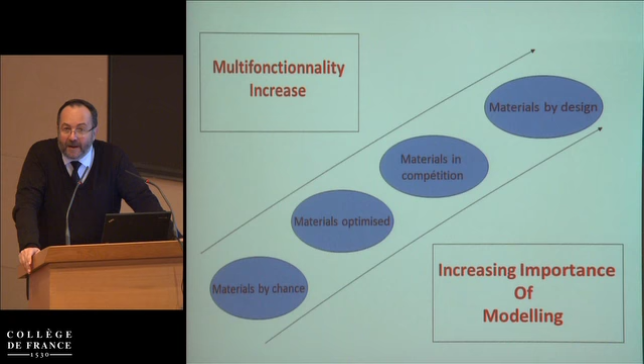This evolution from material by chance to material by design goes together with increased multifunctionality in materials and with increased importance of modeling, in order to explore the space opened up by the various possibilities of creating new materials. So the outline of the course was as follows.

That was a sort of overview of the strategies to obtain high-performance materials. I'm not going to redo the whole series of lectures. I just wanted to put that in perspective, because today we are just going to look at 2 cases for which we'll use all the lectures, all the topics introduced during the 9 weeks.

These 2 topics will be architectured material and bio-inspired material. But that will be understood in a general sense, meaning we will also look at the way of designing microstructure, and the way of processing the material.

The idea is to say: when we have a gap in the space of materials, what are the possibilities to fill this gap, making use of everything we already know in material science, and identifying what topics still need to be explored.

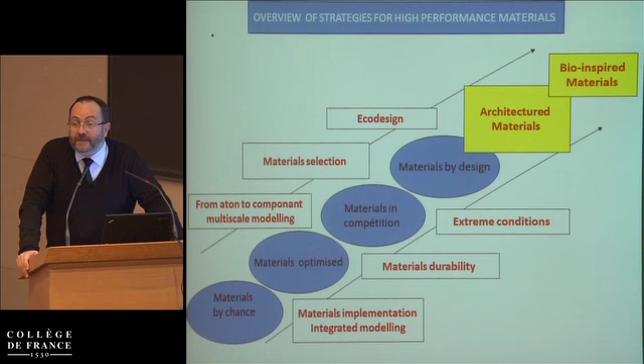Now, the material families we are going to explore are these ones. Of course, naturally there is always a slight bias towards metals. I cannot really apologize for that - I love metals, okay?

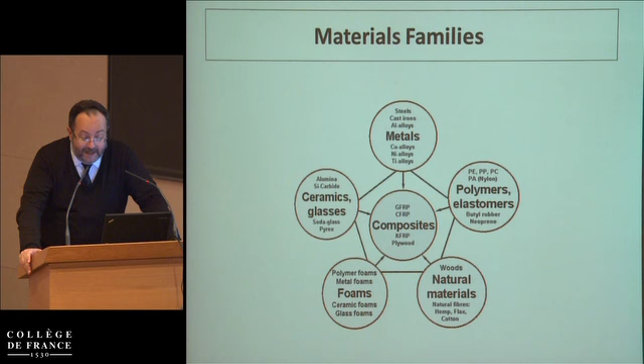But what we try to do here is something generic across the various aspects, and we'll look at the ways of combining materials and combining geometries, in order to obtain properties that otherwise wouldn't be possible with a simple bulk material.

Now the key word here is Swiss cheese. The material space is a Swiss cheese with big holes and regions which are sparsely populated. So what we want to do is fill this Swiss cheese.

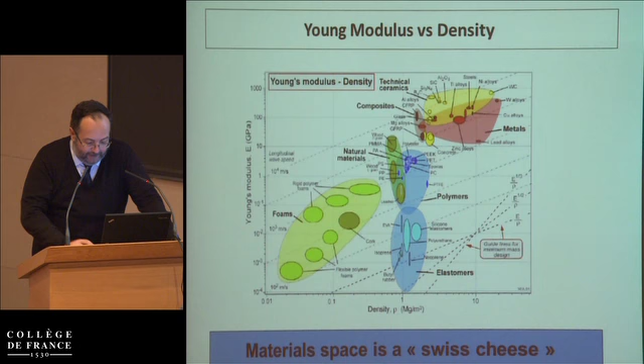And I'm going to show you the first sandwich of the series of lectures, which is this one. The examples I'm going to give are stuffed between 2 skins of the sandwich. The first one is: how can we fill the holes, and the second one is: do we really want to fill the holes?

Between these 2 questions, we'll look at what can come from microstructure design, from associating materials - the case of composites - from architectured materials, playing with geometry, mixing the various strategies, and finally bio-inspiration. That's the stuff of the sandwich here.

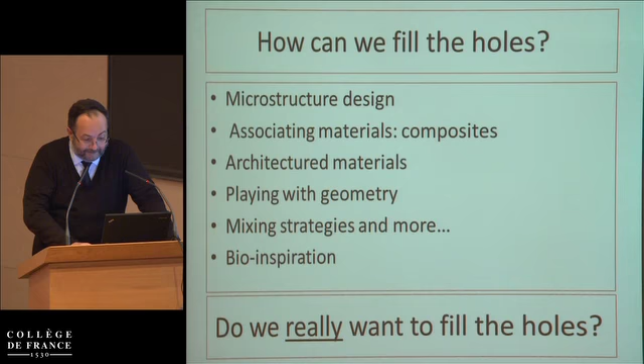Each of these topics will be treated in more detail, either in today's presentations, which are very much about method, or tomorrow's presentations, which will be very much about examples.

Now, microstructure design - let's look at the first contradiction we want to fill. That's a famous curve which I used to call the banana curve. So we start from sandwich, we go on with banana.

All of this is becoming very gastronomical. The banana curve is the counter-correlation between elongation and yield strength in materials, and here it's focused on one of my favorite materials, which is steels.

Here you find that a material with high ductility usually has a low yield strength, the IF steels, and a material with high yield strength generally has low ductility, which is the case of martensitic steel. The whole dream of scientists in steel metallurgy is to escape from this banana curve and develop a material that has a good combination of ductility and strength.

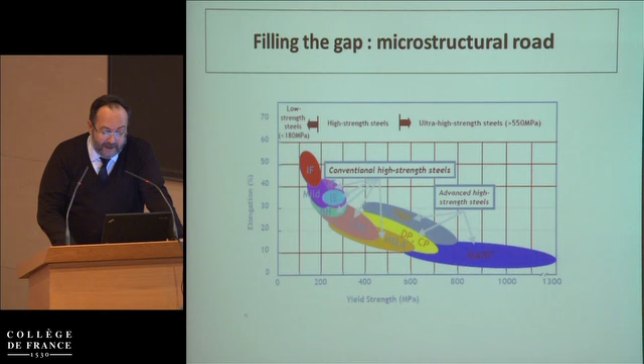Now, the standard way of doing that is to play with the microstructure. So the metallurgist's dilemma is to combine strength and ductility, which are usually contradictory. How can microstructure design find a compromise? The reason for this contradiction has a very deep physical basis, which is the following.

When you look at the plastic deformation of a material with some plasticity, you have the yield stress, which tells you when it starts to plastify, and when the material starts to plastify its stiffness becomes lower. The increase in stress to get an increased strain is smaller than in the elastic regime, and this is called work hardening.

Now, if you look at the possible localization of deformation, if in some region of the sample under tension the deformation gets more localized, at that point you have a higher yield stress, but also a lower section. If the increase in flow stress, related to work hardening, cannot match the increase in local stress from the reduction in section, you get into trouble. Getting into trouble means the localization of deformation continues and leads to rapid failure.

So any material with high yield strength, which favors stress localization where there's a change in thickness of the sample, will need high work hardening in order to spread the plasticity instead of localizing it. That's the intrinsic reason why the stronger a ductile material is, the less ductility it has.

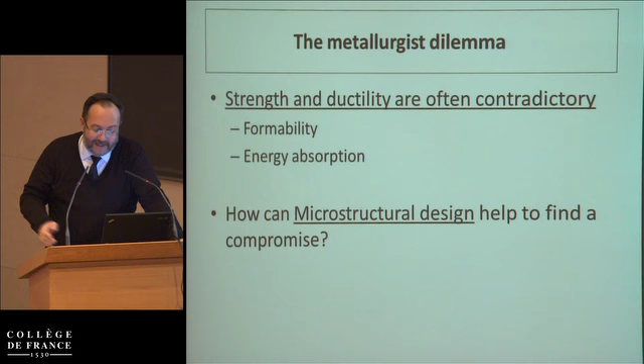Now, that's something which came from composite material but is reused in classical material, called dual phase steels. Dual phase steel is basically a natural version of the composite material - natural meaning you don't mix the inclusion inside the matrix. So there are steels with martensite islands, coming from quenched austenite, embedded in a polycrystalline ferritic matrix. The matrix deforms plastically, the martensite is elastic and fragile, and that's a natural composite.

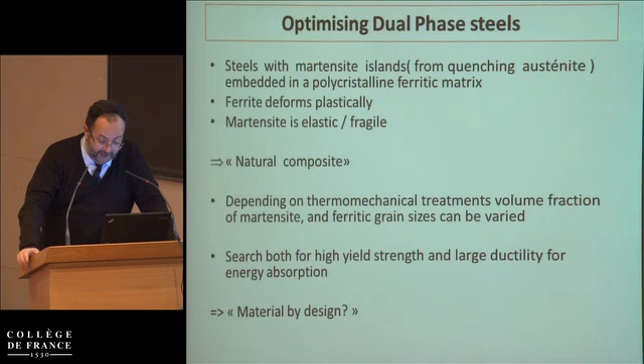You have this mixture of ferrite and martensite. Now what I want to show you is the kind of optimization you can get. That's coming from micromechanics modeling of the behavior of the ferrite plus martensite mixture, and the ferrite behavior also depends on the ferrite grain size.

What you can find is that depending on whether you want maximum energy absorption or maximum resistance with ductility of at least 8%, which are typical requirements for this kind of material, this modeling can give you the best carbon content, the best volume fraction of martensite, and the best grain size in ferrite. So what we've done here is design a material tailored to meet a requirement that would be difficult without this mixture effect.

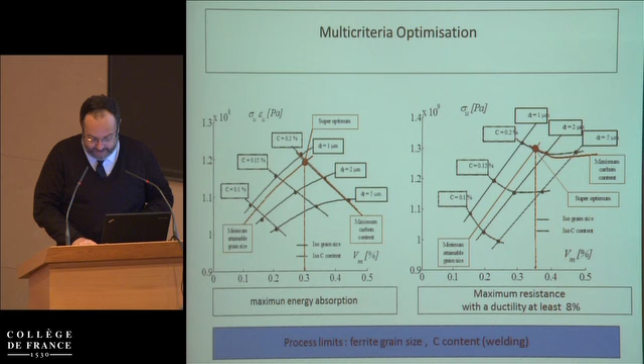Now let's go to composite material, the most classical composite material. What I want to show you now is two examples: an example which is a selection map for light and stiff material, in which you would have a mixture between metals and ceramics, which is a classical metal matrix composite.

Here this mixture would be, for instance, between titanium alloy and carbon fibers. These two materials, titanium alloy, which is represented in this place here, that's a diagram with the Young modulus and the density. The carbon fibers are here, and the properties of the mixture between titanium alloy and carbon fibers will lie somewhere here. These boundaries are given by a micromechanics model, and this maximum here is given by the processability, which is how much carbon fiber you can introduce into a titanium alloy.

So you will have different ways of making mixtures of carbon, of titanium, or any sort of alloy with ceramics, and these mixtures will give you materials which would have a better, say, E to the 1/3 divided by rho property, which would give you the stiffness at minimum weight for a plate, for instance. Now, that's what we call the standard composite.

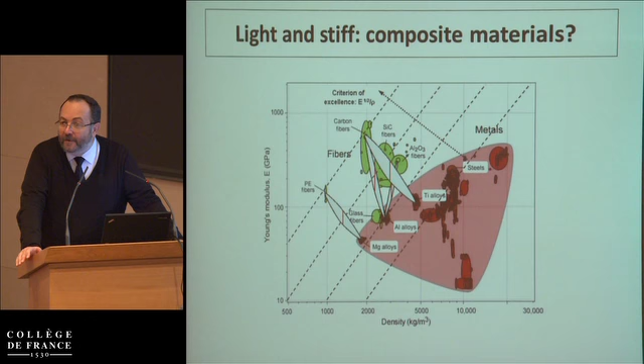Here, of course, it's purely theoretical because you need to know the effect of the mixture between the ceramic and the material, and one ever-coming problem will be the interface between both of them. We'll have a number of talks about the role of interface in the properties of hybrid materials.

Now I want to give you another type of composite, which is a bit more sophisticated, a composite developed for high field magnet design. These materials are wires, they need to conduct electricity, and they are wound around an electromagnet.

What you want to do is make a very high magnetic field, which means you have pulse fields, which means you are releasing a large amount of current in a very short time, in order to reach magnetic fields of the order of 30 Teslas or something like that. They are enormous, which means you are confining a magnetic field inside a finite space, and this confinement gives you a high magnetic pressure. This high magnetic pressure is really a force on the winding, which might destroy the winding.

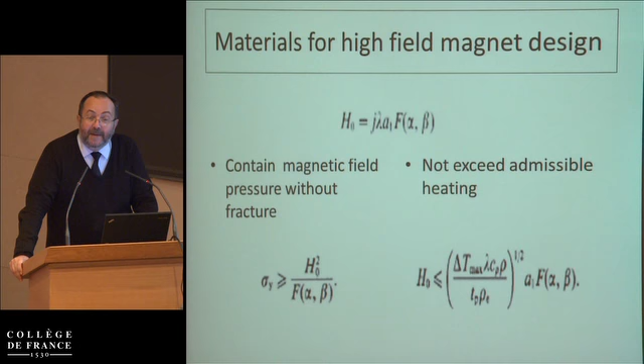Now, you need to contain the magnetic field without fracture. That gives you a first criteria between the yield stress and the field you want to obtain. And of course, you don't want to heat too much, which requires a high conductivity material, and gives you another maximum field you can reach, related to the thermal conductivity, the diffusivity, and the electric conductivity of the material. These two combinations of properties are performance indices, which tell you if the material is suitable to make a high field magnet.

Now, if you look at the material selection charts, which would be on one side the yield stress, and on the other side the combination of electrical conductivity, density, and thermal capacity, you will have here the requirements for various Teslas, various fields you want to reach, and various durations of the pulse.

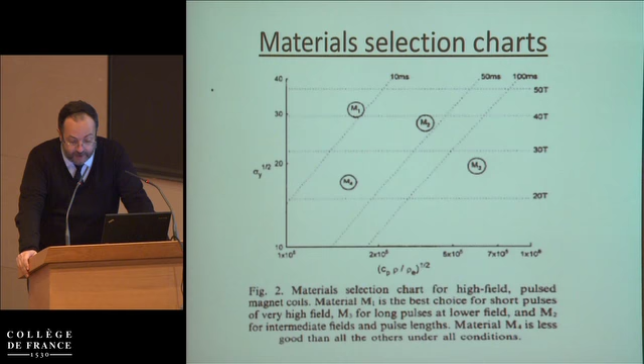Now, here are the candidate materials that you have on these selection maps, and these are very often copper-based materials, either pure copper, or copper reinforced with beryllium, or copper reinforced with niobium, with silver. Pure copper is very good for resistivity, but not good for strength. Maraging steel would be very good for strength, but not very good for resistivity. Again, you have a contradiction between the properties.

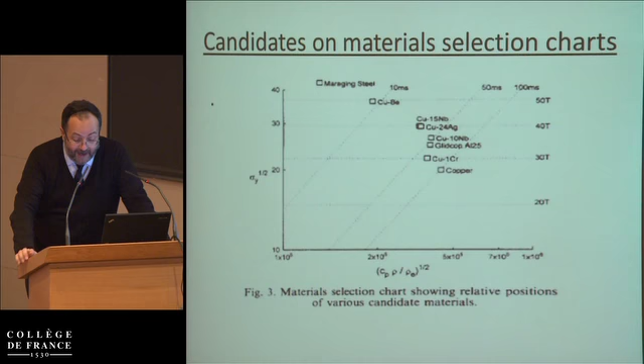Now, one way of dealing with that is to make a composite of composites, and we'll see this example in a number of cases in natural materials again. This composite uses, for instance, a copper-niobium multi-filament structure, which will be extruded. When it's extruded, you take the extruded fibers and put them together again, and again, and again, and you get a multi-architectured structure going from the nanometric scale up to the microns, or up to the millimeter, which is the size of the final cable you try to obtain.

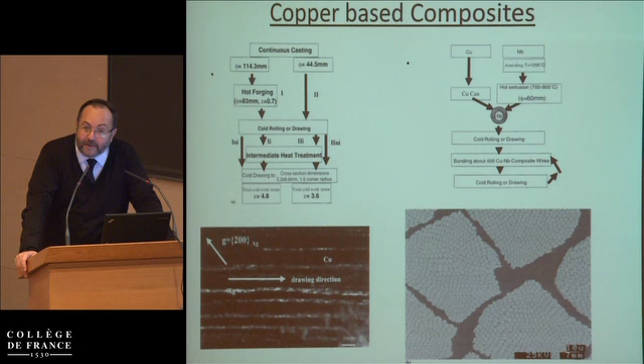Now, interestingly, you can have a direct relation between the yield stress and the spacing between the niobium fibers inside the copper matrix. This spacing is related to the amount of strain imposed on your composite. So you have on one side a process parameter, the strain, which controls the strength of the material, simply because the obstacles prevent the dislocations from moving. That's the meaning of the first equation. The second set of equations is the relation between the electrical resistivity and the distance between the fibers, because the fibers play the role of scatterers for the electrons.

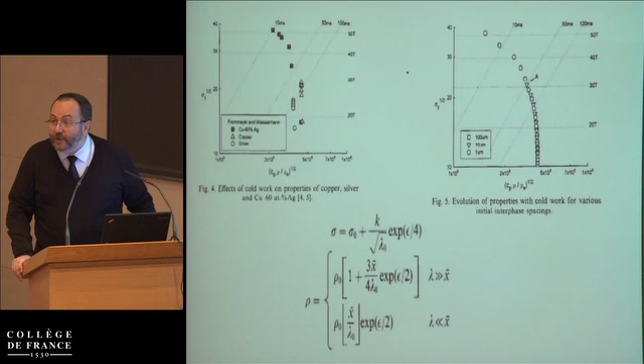So again, you have a possibility to relate one process parameter, which is a strain, to the other property. Now what you have here on this diagram is a way of exploring the performance diagram by using different strains, looking at where you should strain the material, how far you should strain the composite, in order to reach the point you want in terms of duration of the pulse of the field and magnitude of the field.

Now let's go to the architectured material, which is another strategy to fill the gap. I want to make a point of vocabulary, because people are always complaining about the difference between hybrids, composite materials, and architectured materials. I think the grammarians in Byzantium were discussing the sex of angels while the Turks were surrounding Byzance. So I think we shouldn't do that. The idea is just to see different ways of looking at strategies to improve material.

The composite can be understood as a mixture of material. A hybrid material is much more controlled in a way, so some composites can be seen as mixtures, as hybrid materials. The hybrid is a combination of two or more materials in a predetermined geometry and scale, optimally serving an engineering purpose. That's coming from the PhD of François-Xavier Kromm, who is in the room.

Now, what is an architectured material in addition to that? In addition, we have one length scale of the microstructure of the architecture which is of the order of one length scale of the component in which you are going to use the material. Okay, so that's what I call architectured material.

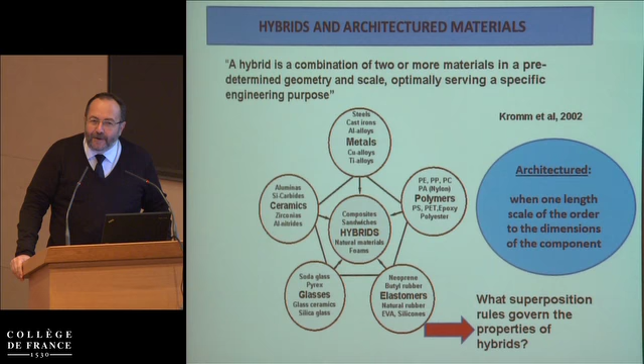Now the question is, what is the superposition rule which governs the properties of the hybrids? And when you come to the situation of one length scale being comparable in the material and in the component, then you have an extra condition, which is: what continuum description can be provided in that case? I think that's still an open question - what continuum description can you provide of a material whose internal scale is not very small compared to the scale of the component in which you're using it?

Now, the architectured material - that's my pet architectured material - is the combination between conductivity and strength. What I want to discuss more now in detail is the combination between conductivity, bendability, and electrical insulation, which is this architectured material, this cable.

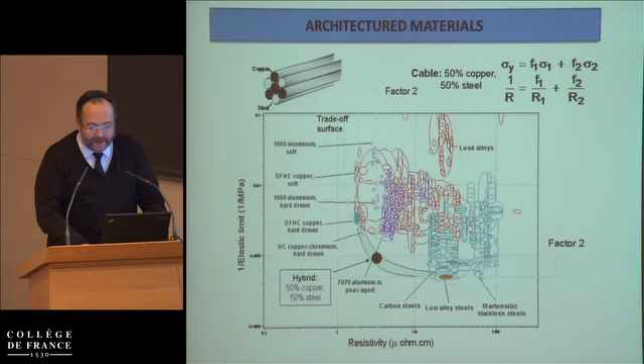Okay, so let's look at the general strategies to get that. You first analyze a requirement, and you look in terms of function and constraint, and try to look at what are the contradictions. So here I want to design an electrical cable combining longitudinal conductivity, radial insulation, and elastic bendability.

Now there is no material which meets all these conditions, so I'm going to decompose these requirements into a number of requirements, each of which is going to be dealt with by a material, and then I will have to join the materials together.

So good conductors are metals, but they have a high modulus and high flexural stiffness unless they are thin enough. Now, if we look at the function of longitudinal electrical conduction and elastic bendability, copper can provide that. If you look at the function of longitudinal radial electrical insulation and elastic bendability, a polymer can do that. A ceramic would give you the insulation, but would not give you the bendability.

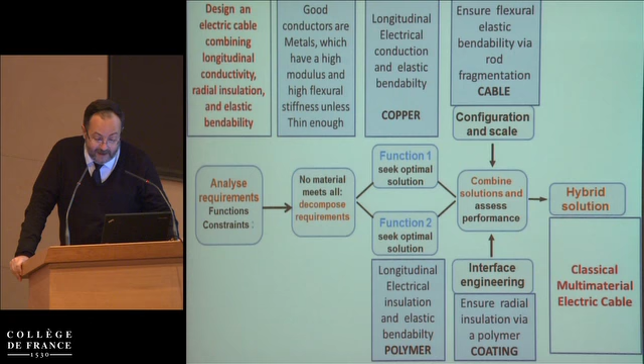Now, these two materials are going to be put in a given configuration. So instead of having one single rod, you are going to fragment that into various filaments, and that will create the cable effect, ensuring flexibility. You will have to deal with interface engineering - how can you be sure that the polymer is properly sticking to the wire? Then you can get a hybrid material. The classical electric cable is one example of this multi-material approach.

Now, we have seen a number of these multi-material, architectured material examples in the series of lectures, and we'll see a number of them again on the second day.

Now let's play with geometry a bit, which is another one of our strategies. Here is the simplest geometric effect you can think of: you want to add stiffness, or you want to remove stiffness. That's something people in mechanics have known for decades. If you read the nice books from the 50s about designing airplanes, you have a number of ways of stiffening an airplane which are just absolutely fantastic. The imagination of these people was absolutely remarkable.

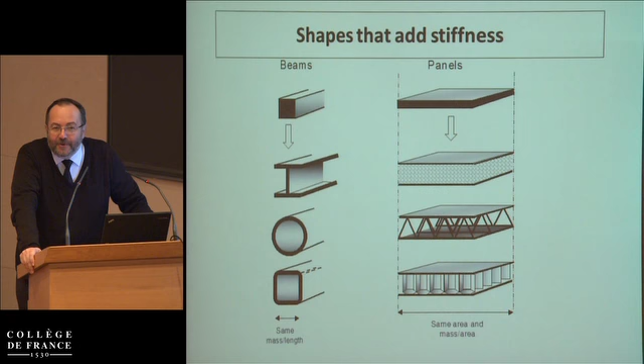If you look at the table for cables, the number of possible organizations of cables in order to ensure flexibility, bendability, strength, friction between the filaments, conductivity, heat transfer, vibration damping, and so on, is also a very huge variety.

There are things which are a bit less obvious, for instance when you want to stiffen a sandwich, you can put a foam inside, which makes the two plates sufficiently apart from one another, so that the elastic momentum of the section of the sandwich is large enough. That's one possibility. To put them far apart together, you can put a foam into that, but you can also put a truss structure.

The truss structure is a very nice example of architectured material. Here you have the picture of a truss structure on top. But now, what you want to do as an engineer is make a lot of them, make them cheap, and make them efficiently.

Now you see there is another problem after. If you have this structure, which is a cheap way of making this truss structure, you still have to put that into two plates, so you have to find an efficient way of joining the two plates together. Then you can think of gluing, brazing, welding, and so on.

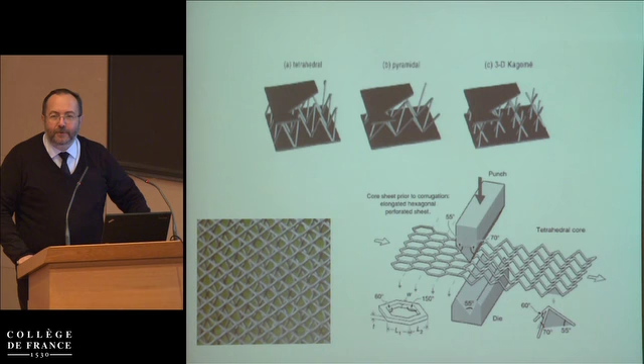I think the reason I wanted to show you this picture is that it's all fine to imagine a very nice architectural material, but you have to think of the way of making them. We will have a number of examples which will show how to make architectural materials.

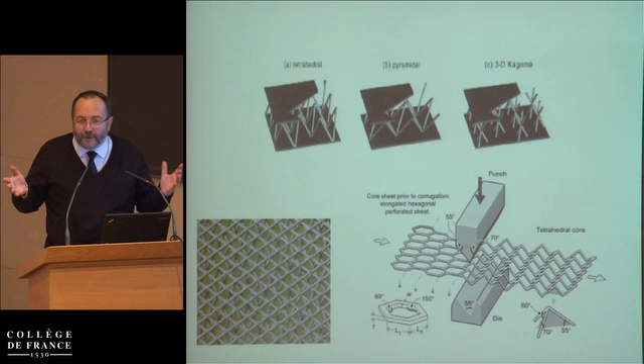The strategy of people coming from chemistry is to make them bottom up, to start from the atoms and stack them in a self-organized way in order to end with a structure. What we are going to examine here is a way to get the material top-down, starting from macroscopic aspects and trying to look at processes to get these architectures.

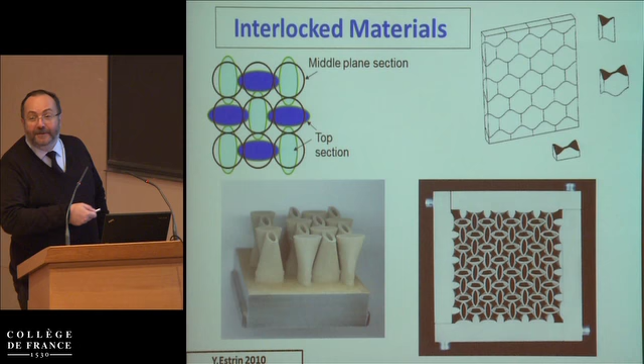Now, mixing strategy—after all, do we have to choose between playing with a microstructure and playing with a geometry? I'm going to give you an overview of these architectural materials in terms of scale and in terms of ways we can combine them.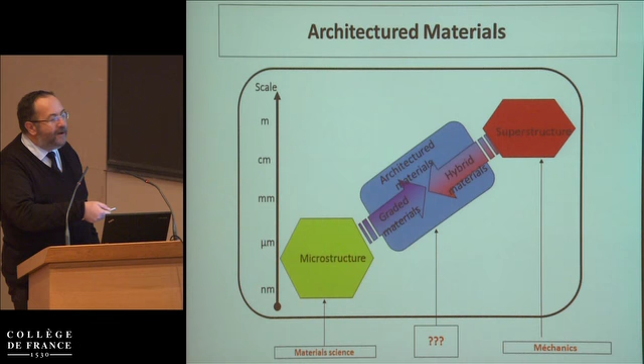So here you will find the foams, you will find the truss structure, you will find the wools, you will find the entangled material. So this bunch of possibilities opens up a wide variety of materials.

Now, here is an example. Again, I want to show that you can get an architectured material by standard processes.

This is the process by which you can make a more ductile material, which is very strong, when the ductility is limited by the propagation of cracks from the surface. If you manage by phase transformation to have a soft layer at the surface, it acts as a protection against crack propagation, which proceeds inside the soft layer, and when it reaches the hard material, the crack has been blunted by its first pass. You get a material which is both strong enough, because you've kept the properties of the core, and more ductile, because you've killed the dangers of, for instance, machining scratches on the component. That's an example of an architectured material obtained here by phase transformation.

Again, we are back to my old friends, the steels. What we are doing here is removing the carbon by annealing the material in argon hydrogenated gas, which removes the carbon, and you have at the surface a layer of ferrite, which is soft by nature.

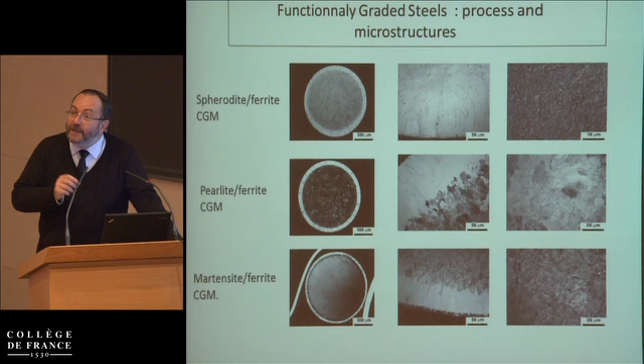Now, we don't have to choose, and I want to give you this picture, originally due to Olivier Bouaziz. If you want to make a shaft in torsion, stiffer, and keep it light, one way is to go to the material scientist and say, I'm going to make a composite. If you go to a person in mechanics, he'll say, I don't need to make a composite, it's a shaft in torsion, so I can take the same matter and distribute it on a larger radius with a hollow core, which increases the torsion momentum, so with the same amount of matter, I get something stiffer.

Now, you're not bound to choose between material science and mechanics. Nobody prevents you from doing both, using the geometry and the materials and the composite.

When you think of it, you've only done half of the way here, because you've equally distributed the reinforcement along the radius. But really, the region where you need the stiffening is the outside, not the inside. So another way is to make a gradient, with a higher density outside and a smaller density inside. Now you have to think of the process to do that.

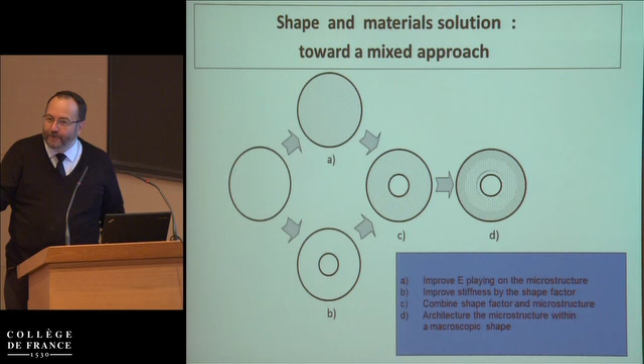It can be done by rotating casting, in which the particles would go to the outside, and you would have a gradient which is basically the equivalent of Perrin settling. Instead of having it vertical, you would have it around the radius, and the role of gravity is simply replaced by centrifugal forces.

Now, what you have to keep in mind is that for a given set of requirements, you need to select the material and the process, but also the microstructure and the architecture. In each case, you need to look at the relation between the architecture and the properties, and what process allows you to get this architecture, but also the relation between the microstructure and the properties, and what process allows you to obtain these properties.

And that's not always obvious, because the processes are very often used for bulk material, and if you go to architectured material, you're going to have material with thinner parts, for instance. So an interesting feature is how you can develop a foam of metal with structural hardening, and what heat treatment is necessary to obtain the appropriate microstructure inside the structure, which in itself, by its geometry, already has different thermal properties than the bulk material.

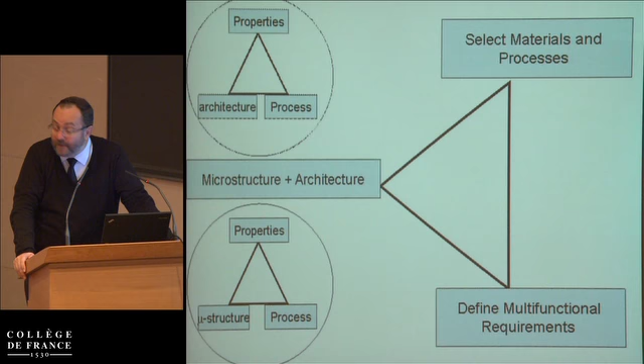Now, let's go further, because here I've shown you the microstructure, I've shown you the architecture, the composite, how we could have them all together. So if we go on looking at possible strategies, I'm going to give you an example due to Bernard Herrieix, on which there has been a number of studies, including by Rémi Dendievel, which is the question of thermal management in buildings.

So you want a device able to store a lot of heat and also release it rapidly. Basically you want to deal with the peak of the tartine le matin and of the noodles in the evening, to smooth out the extra consumption of energy along the day. What you need is a material with high thermal inertia to store heat, but also a material with high thermal conductivity to release it efficiently.

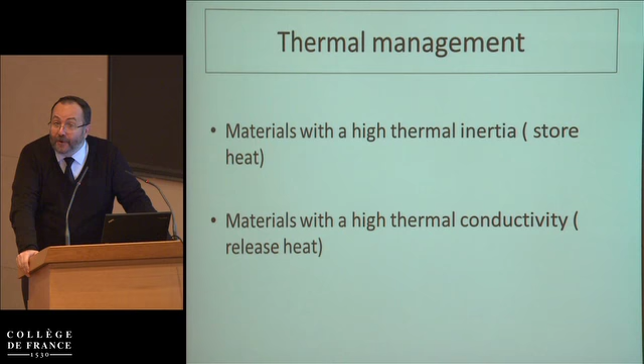And bang, no chance. If you look at specific heat and thermal conductivity, they are exactly anti-correlated. So again we are in a situation where there is a hole in the space of materials, and that's a hole we want to fill, somewhere here.

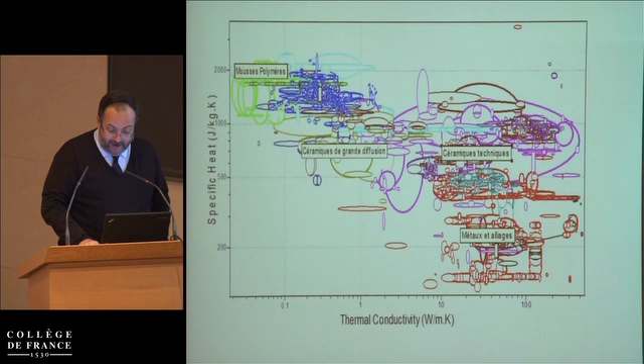Now, the point is that in order to do that, the strategy is not simply to play with materials' properties or behavior. If you want high thermal capacity, one way is not simply to play on the thermal capacity of matter, but also on the phase change of matter. The latent heat of a phase transformation plays the role of an apparent large thermal inertia—that's phase change materials. Of course, phase change materials like paraffin are not exactly good conductors.

So one way of dealing with that is to embed paraffin into a structure which is thermally conductive. One of these structures might be a honeycomb structure with metal, or an entangled structure like steel wool. Both of these are going to provide you the material.

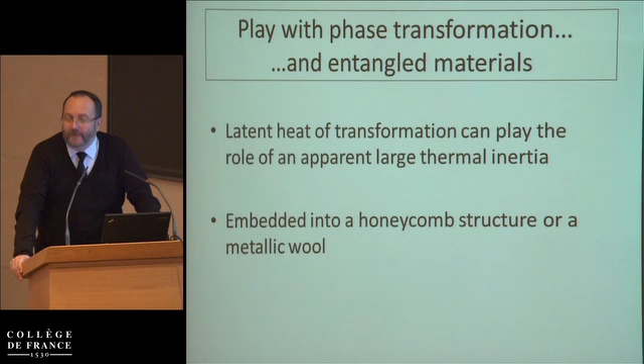And you see now the concept of material is becoming very wide—the material fulfilling your set of requirements. Now we come to bio-inspiration from natural material.

I'm not going to talk very long about that, because that will be one of the topics Peter Fratzl will deal with just after me, and tomorrow, from an evolution viewpoint, John Dunlop will also talk about it. Now, bio-inspiration from natural material.

I want to start with a diagram we devised together, basically the parallel between biological material and engineering material—we've seen this in one of the lectures at the Collège de France. The idea, simple in principle but not easy to implement, is that nature has a limited number of elements it can use and a limited number of processes. You are bound in natural situations to what is called soft chemistry—bound to deal with aqueous solutions, bound to deal with polymers.

The price nature has to pay in order to get efficient structural materials is to play on the variety of architectures, on the variety of hierarchies, organizing matter so the required properties are obtained. So you have two rules: one is to architecture the distribution of matter at different hierarchical levels, and the second is that any brittle material should be kept at small scale.

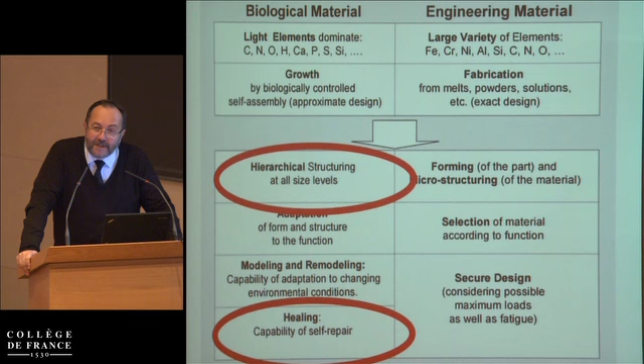This large variety of material and elements is also related to a large variety of processes, including access to high temperature processes, which are very interesting. Now, it's playing with microstructure, but the variation in terms of architecture and different levels of architecturing is much less than what you find in nature. And here's the dream of an optimist like me, and Peter is probably equally optimistic: what if we could merge the variety of architectures found in nature, at least in principle, with the variety of constitutive materials found in engineering? If you can combine both, you considerably expand the space of materials. Now I want to show you three examples, just pictures, to show the variety of architecture.

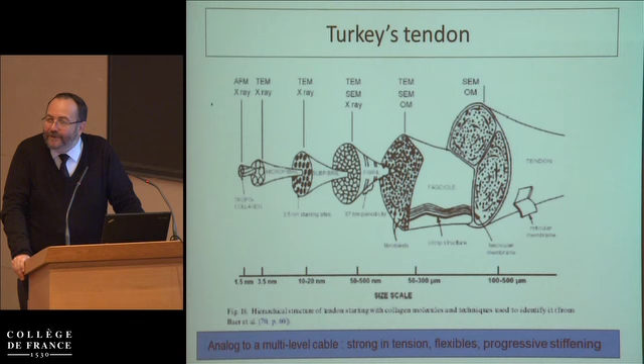That's a turkey tendon. When you look at the turkey in the depths of its eyes, it's really a stupid animal, and nevertheless it has a beautiful cable structure for its tendons. If you look at bone, it's also a very nice example of architectural material. And the third one is wood, well known to everybody, which is extremely efficient as a way of architecturing a mixture between lignin and cellulose.

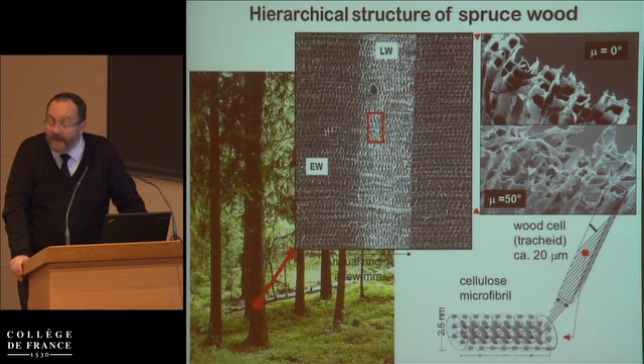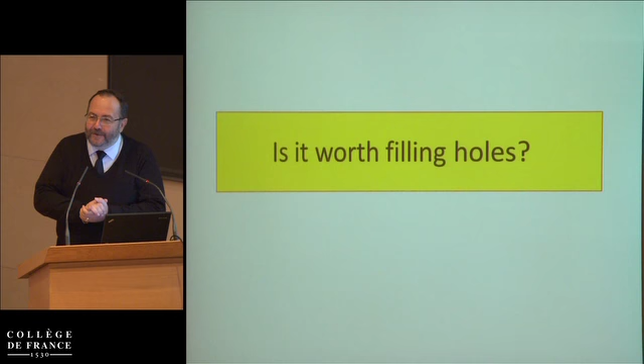With all these strategies outlined, just to give you an overview of what we are going to see in the next two days, the question remains: we want to fill holes. Is it really worth filling the holes? I go back to basics: material is matter with a function, not simply matter. So is it worth filling the holes? For instance, is it worth developing titanium foams?

Titanium, as a bulk material, turned into foam gives an architecture. What would be the property of a titanium foam? What could be the application of titanium foams? And what would be the market for titanium foams? That's what the engineer would ask about this question.

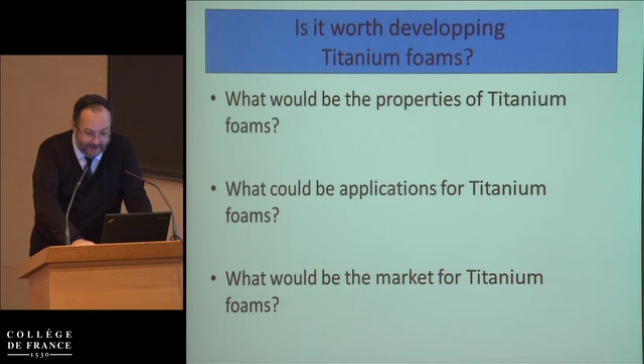So the properties of titanium foam - let's look at virtual titanium foams. The Young's modulus is going to be related to the modulus of the constitutive material and to the density of the titanium foam, with the relative density following the famous Ashby-Gibson scaling law. The plastic collapse limit will also be related to density, with a different power, a different exponent. The densification strain is also related to density, and the thermal conductivity is also related to density. All this gives you the properties of the foam, knowing the properties of the material.

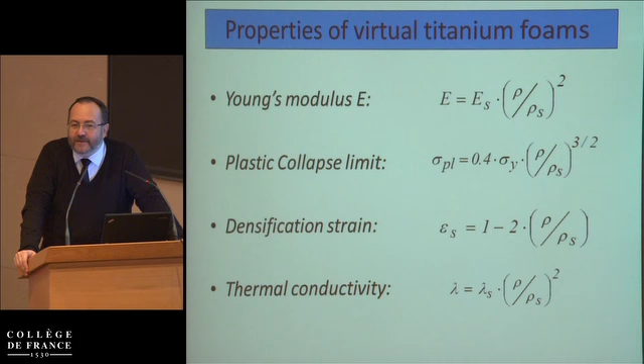Here I've chosen a case which is relatively simple, relating to elastic properties. The reason it's simple is that these properties are not going to be too much changed by the process of foaming - the property of the constitutive material stays the same. Now, if you were looking at plastic properties, the situation would be different, because the plastic properties of titanium inside a foam, if you take a little bit of titanium inside the wall of a foam, might not be the same properties as the titanium in bulk form.

Now I want to show you a sort of global strategy for looking at possible applications of a material. There are three ways of looking at that. If we think of selecting a material, what you do is take a set of requirements and a database of materials and try to merge them together. You have a metric, which is performance indices, and this will tell you whether this material is suitable for this set of requirements. It's more sophisticated than that, but at depth that's basically what you're doing.

Now, if you look for materials for a given application, you have to reverse the problem. You have a database of applications, you have a new material, and you want to know how this material matches one of the applications. That's a dream - that was the third column here, the application match. We worked a lot with Alexei Salimon and Mike Ashby to develop this branch, and I think it was a failure, because having a structured database of applications is extremely difficult. You cannot make a tree of that. I will probably come back to this problem one day, but right now I don't know how to deal with it.

Another way of dealing with the problem is to make a function search - to say, well, for this material, I can compute its performance indices, and I can look for which of these performance indices this material seems to be better than 90% of existing materials. That's a way of saying this material is especially interesting for this combination of properties, and this combination of properties reflects a possible application.

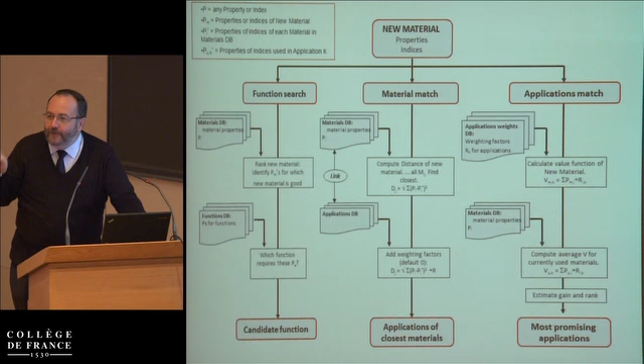And then, for each of these materials, you can store in a database the possible applications of these materials. So you can say, well, my new material is close to this existing material, which is used for this application, so maybe my new material might be used for this application too.

Of course, there is a problem there. Because if I do the distance simply as a Euclidean metric, just looking at the difference between properties, I might find an application for which some of the properties are totally irrelevant. So that has to be done in an iterative way, in which you look at what material is close, look at what the applications are, look at what properties are relevant for this application, and rebuild a distance to see if it's still close for this property, and so on and so forth.

So that's a way of exploring possible applications. But now...

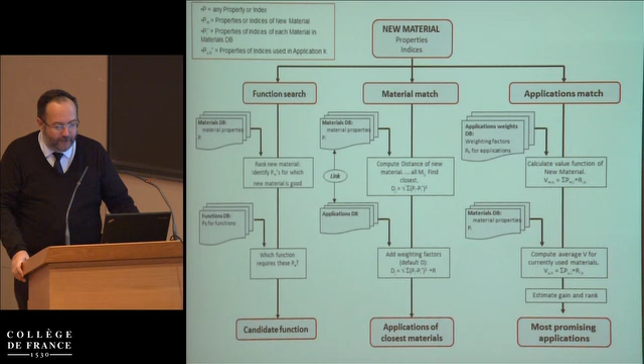Just to finish the story: when you do that with the titanium foam, you have a number of suggestions which come out. But what I want to finish with is that one of the consequences of that is that usually when you have a new material, you don't know all the properties. But this enables you to say: well, this new material, of which I don't know all the properties, seems to be close to this other material, which is used for this application.

In order to know if my material could be useful for this application, I would need to know these properties. So that, in a way, tells you what you would need to know about this new material in order to see its possible application. So if I think of a spring, if it's a vibrating spring, obviously I need things related to fatigue — that means I need to study the fatigue of these bulk amorphous materials.

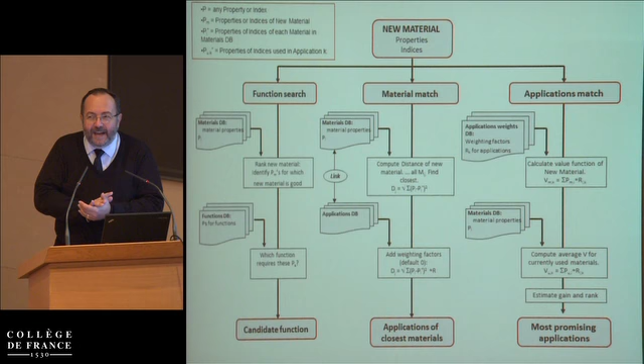So what I wanted to show you here is a sort of tool, a systematic approach, in order to see: is it really worth filling the hole in the space of materials?

Now, let's go, and I want to finish by giving an outline of the program of the colloquium. Today, we are going to have method, essentially, starting with two overviews — the one I've just given you right now, and then Peter Fratzl is going to speak about biological materials, lessons from multi-scale, multifunction, and adaptive design.

So we'll start right from the beginning by having two aspects: the engineering viewpoint and the viewpoint of the biologist. Now, we will have a presentation from Alexis Deschamps, who will explain how to play with microstructures, and how everything we've learned by microstructure design can be used.

Now we have a number of variations on the microstructures, and there will be two examples: a variation on processing and a variation on designing graded microstructure via phase transformation. That will be Damien Fabregue on top-down processing of metallic architectured materials.

So that will be designing composites, I would say architectured composites. The example that Qingquan Lai will give you is designing the microstructure in such a way that you can have a graded interface, and not simply a sharp interface.

Now, we'll go beyond materials, because I think it's always good to look outside. And 'more than materials' will mean looking at sensors and looking at a device, not simply at materials, and looking at a device in which we can get inspiration from nature. That will be the presentation of Jérôme Casas.

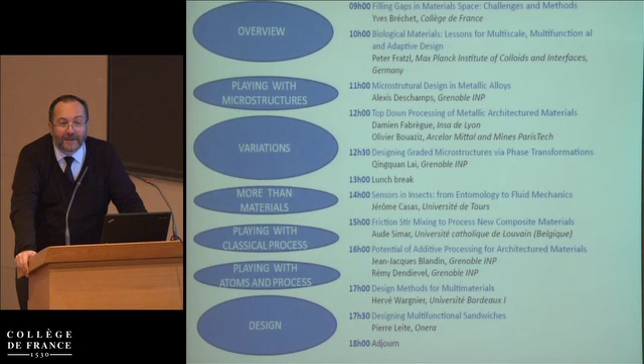And then we will have two examples of design. The design will be focused on design method for multi-material, which will be given by the Bordeaux team, and design method for multifunctional sandwiches, the sandwich being the most frequent and probably the simplest of architectured materials.

Now we will have after potpourri, and the potpourri is purposely disorganized. So I didn't want to have one morning on engineering material and one afternoon on biological application. I wanted to have the two intermixed so that the two communities could see what the other one is doing.

So we'll start by architectured material in building, multi-material design for electromagnetic screening, which is a very nice example of associating properties, constitutive material design, geometries, and for an application which is not structural, which is a functional application. Architectured material in biology will be our third viewpoint, an overview by John Dunlop.

This will take the viewpoint of evolution. Nature is evolving, just like engineers are progressing, just not on the same time scale, hopefully for the engineers.

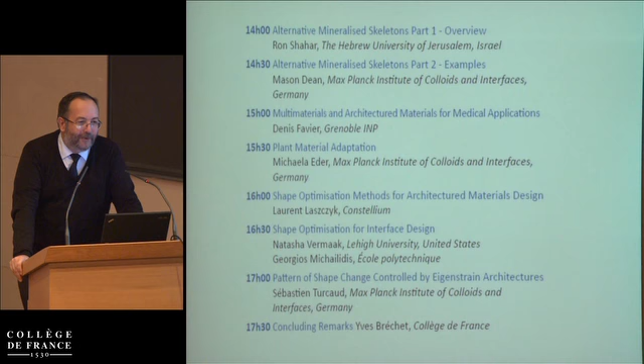I just forgot the conclusions. So there are some concluding remarks.

The first one is that microstructure design is just one possible route for tailored materials. That was one of the messages I wanted to give you during this presentation.

Second one is millimetric shape architectures are a powerful design variable for multifunctional requirements. There is an immense variety of possibilities which is opened by the combination of architecture plus microstructure, and we are just at the beginning of this exploration.

But it requires the development of models as a guide for designing new materials. It's just an ideal playground to look at bio-inspired design, whether we take the top-down approach that I've been presenting, or the bottom-up approach, which is much more along the chemistry viewpoint on these architectured materials.

There is a lot to be done and learned by a strong interaction with biology, and of course my standard motto, which is there is plenty of room in the middle.

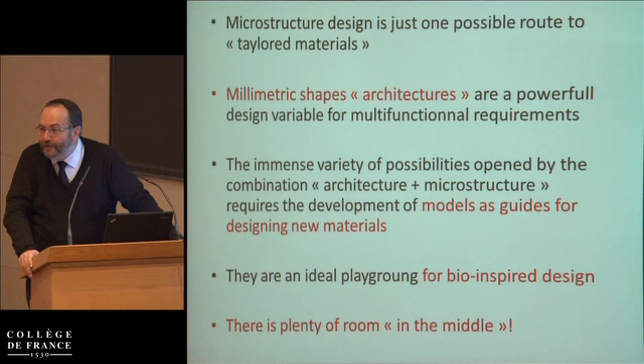Just last picture. This is a microstructure. This is an architecture, and this is a nest. Thank you.